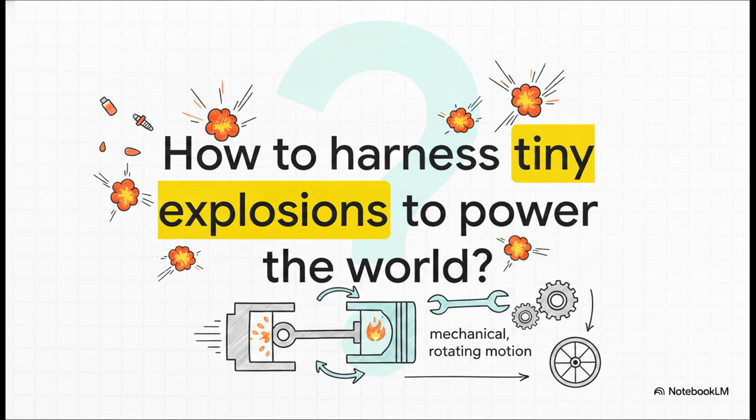Today, we're opening up the hood in this explainer to look at the fascinating physics and engineering that make all of this possible. So the fundamental question we've got to ask is, how exactly do we harness tiny, violent explosions to smoothly power the world? We have to convert chemical energy from fuel into thermal energy, and then somehow turn that intense heat and pressure into mechanical, rotating motion. And the best part? We're going to make sense of this entire process today without getting bogged down in complex calculus or terrifying thermodynamic equations.

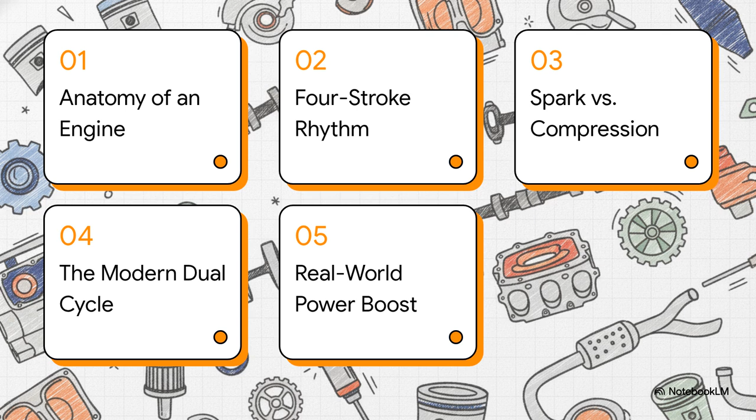To keep things nice and clear, we're going to follow a simple roadmap: 1. The anatomy of an engine. 2. The four-stroke rhythm. 3. Spark versus compression ignition. 4. The modern dual cycle. And 5. Real-world power boosts. Okay, let's jump right into section 1, the anatomy of an engine, the fundamental building blocks of power.

Before we can understand how the engine actually breathes, we need to know the basic physical parts of our mechanical heart. Inside the engine cylinder, there's a piston that moves up and down. Top dead center, or TDC, is the absolute peak of that movement. It's literally the top of the piston's breath, right before it stops completely and gets pushed back down. You can think of it as the ultimate maximum squeeze point.

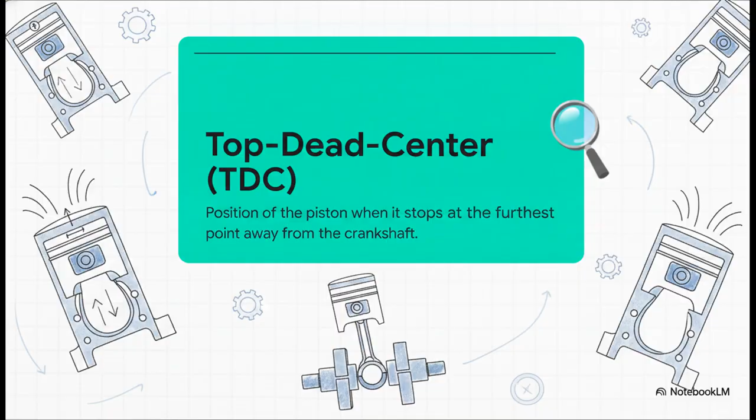Now, when the piston reaches that absolute peak at top dead center, there's still a tiny bit of empty space left at the very top of the cylinder. We call this the clearance volume. And what's really fascinating here is that this tiny clearance volume is where all the explosive magic actually happens. All the air and fuel get trapped and squeezed into this incredibly small pocket, just waiting to be ignited.

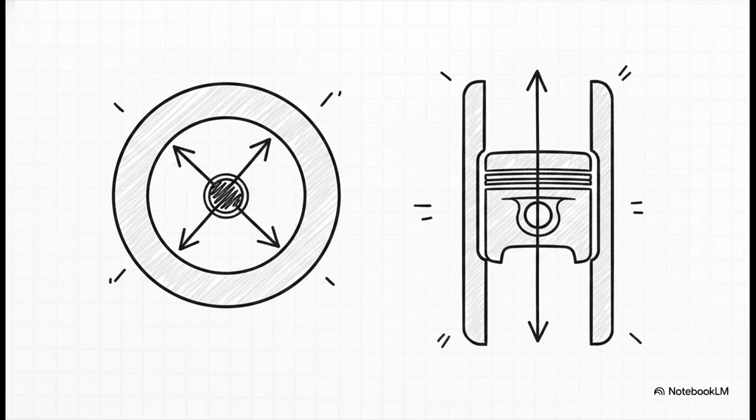To measure the overall size of the engine, engineers use two simple terms: bore and stroke. The bore is simply the diameter of the cylinder itself. The stroke is the total distance the piston travels from its absolute lowest point all the way up to top dead center. Think of the bore as how wide the engine's lungs are, and the stroke as how deeply it breathes in and out.

Together, these determine the engine's displacement, which is a massive factor in how much power it can ultimately produce. Moving right along to section 2, the four-stroke rhythm, the breathing cycle of the ideal Otto engine. Now that we've got our parts identified, let's establish the rhythm. This cycle, which was perfected by Nicholas Otto way back in 1876, acts as the engine's heartbeat. It takes 4 distinct strokes of the piston to complete one single cycle.

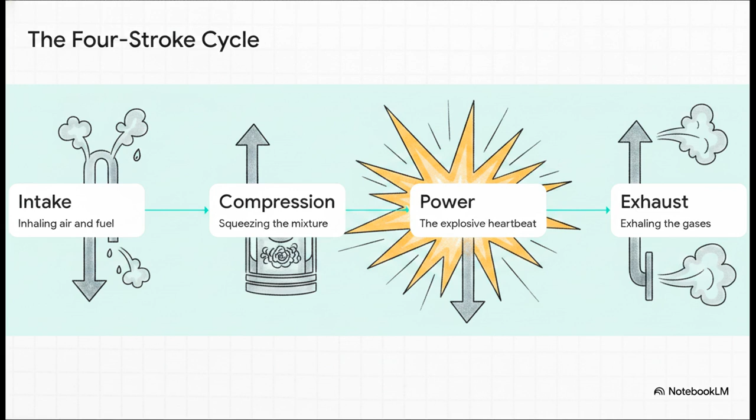First up is intake. The piston moves down, inhaling a mixture of air and fuel. Second is compression. The intake valve closes, the piston moves up, and it squeezes that mixture tightly into the clearance volume. Third is power. A spark ignites the mixture, causing a massive expansion of hot gas that violently forces the piston back down. And finally, the exhaust stroke. The exhaust valve opens, and the piston moves up one last time to exhale the spent gases. Then it's ready to start the whole loop over again.

Thermodynamic textbooks are absolutely filled with dense formulas analyzing this cycle. But honestly, the key takeaway is wonderfully simple: as the compression ratio goes up, the thermal efficiency goes up. Meaning, the harder you squeeze that air and fuel mixture before introducing the spark, the more efficient and powerful the resulting explosion will be. It basically boils down to this: squeeze it tighter, get more power out of the exact same amount of fuel.

Which brings us to section 3, spark versus compression ignition, the great thermodynamic showdown. So there is a physical limit to how hard you can squeeze gasoline before it explodes entirely on its own. And this introduces the historic rivalry between the Otto cycle we just talked about and the diesel cycle, perfected by Rudolf Diesel. The Otto cycle, which uses gasoline, needs an electric spark plug to ignite the fuel in a closed, constant volume.

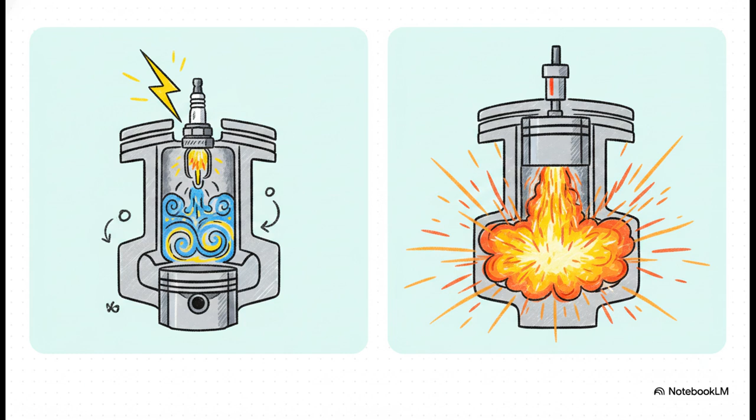But the diesel cycle does something entirely different. It only compresses pure air. It squeezes that air so incredibly hard that the air becomes superheated. Then fuel is injected directly into that scorching hot, highly pressurized air, causing the fuel to self-ignite almost instantly at a constant pressure, absolutely no spark plug required. When we look at the actual numbers behind that squeeze, the difference is just staggering.

Because gasoline engines compress a pretty volatile mixture of air and fuel, they can only really handle a compression ratio of about 8 to 11 before the fuel knocks, or prematurely explodes. But because diesel engines are only compressing air, they can push the compression ratio all the way up to anywhere between 12 and 24. That extreme compression is exactly why a diesel engine is so incredibly efficient and doesn't even need a spark. The sheer pressure does all the heavy lifting of ignition.

When we weigh the real-world trade-offs between these two amazing feats of engineering, a very clear picture emerges. Spark ignition engines draw in an air-fuel mixture, use a spark, and generally run at much higher speeds with a lighter build, which is perfect for, say, a sports car. On the flip side, compression ignition, or diesel engines, draw in only air, use extreme pressure for ignition, and require a much heavier, sturdier physical construction just to contain those massive internal pressures. Because of that heavy build, they run at lower RPMs, but they deliver incredible torque and much higher thermal efficiency.

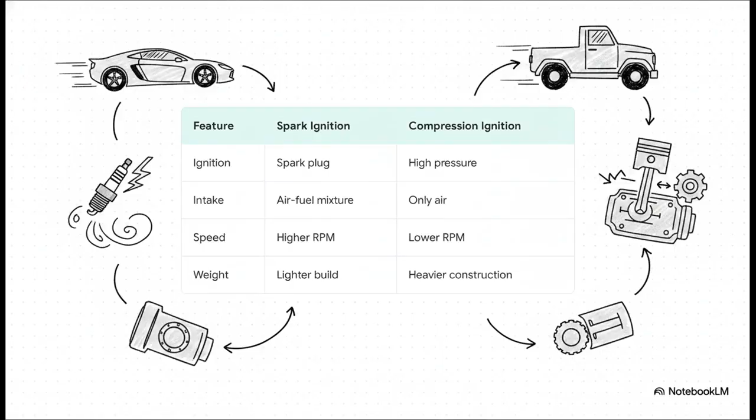Let's transition into Section 4, the modern dual cycle, adapting ideal thermodynamic cycles to reality. The original pure diesel cycle was fantastic for slow, massive engines, but engineers really wanted to put these highly efficient engines into faster vehicles. To make high-speed diesel engines a reality, they had to create a bit of a hybrid compromise.

In a modern compression ignition engine, treating the combustion as strictly constant pressure just isn't entirely accurate anymore. Instead, the heat addition is modeled as partly happening at a constant volume, just like the Otto cycle, and partly at a constant pressure, like the diesel cycle. This clever blend is what we call the dual cycle.

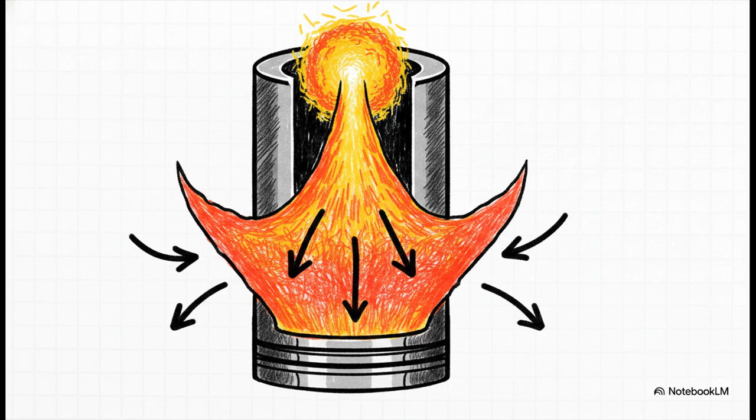Now, how do they actually achieve this dual cycle? Instead of waiting until the piston is exactly at top dead center to inject the fuel, modern high-speed engines start spraying the fuel in at about 20 degrees before the piston reaches the absolute top. This gives that first little bit of fuel enough time to ignite and burn while the piston is still finishing its upward travel, perfectly simulating a constant volume Otto-like explosion.

Then, as the rest of the fuel finishes injecting, it burns as the piston starts moving down, keeping the pressure nice and high into the expansion stroke. It's a beautifully timed dance that maximizes power output and efficiency.

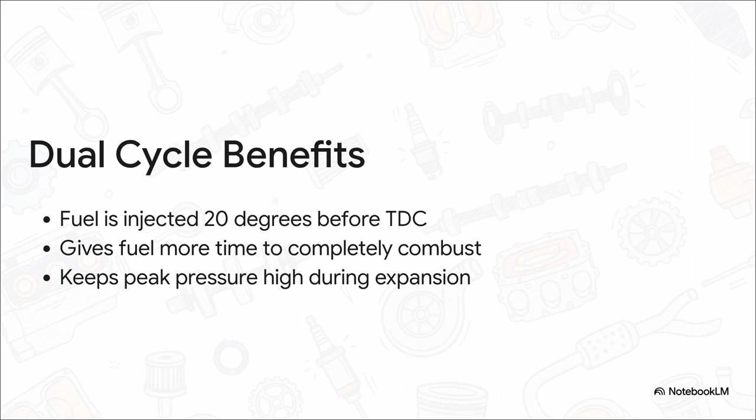And that brings us to our final part, Section 5, Real-World Power Boosts, Turbochargers, and Historical Quirks. Remember earlier when we said that engine power is largely dictated by how much air it can breathe in? Well, engineers, being engineers, invented ways to force-feed the engine air.

A supercharger uses a mechanical compressor driven directly by the engine's rotating crankshaft. It's super fast, but it adds what's called a parasitic load, meaning it actually steals a little engine power to make a lot of engine power.

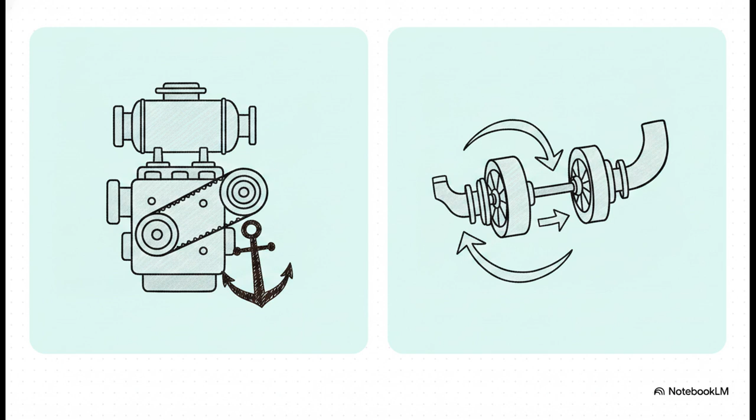But a turbocharger? That's an elegant piece of engineering right there. A turbocharger uses a turbine driven purely by the rushing exhaust gases leaving the engine. It literally recycles the wasted exhaust energy that was just going to be blown out the tailpipe anyway, using it to compress incoming air and force it into the cylinders for a massive, efficient power boost.

And history provides some truly wild anomalies that show just how creative engine design can get. Back in World War I, the famous Sopwith Camel aircraft, yes, the exact one Snoopy flies in the Peanuts comic strips, used a rotary engine that turned conventional design completely inside out. Get this: instead of the engine block sitting still while the crankshaft spun the propeller, the crankshaft was bolted rigidly to the airplane.

The entire massive, heavy cylinder block of the engine rapidly rotated in circles around the stationary shaft, taking the propeller with it. This crazy setup kept the engine cool in the air and generated massive gyroscopic forces that allowed the aircraft to perform incredibly sharp, unique dogfighting maneuvers that standard planes simply couldn't match.

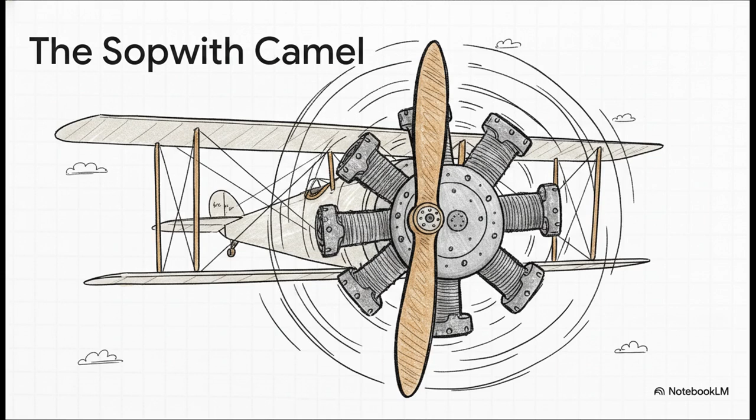So, from the Otto cycle's perfect four-stroke rhythm to the extreme pressures of the modern dual cycle, and even those spinning engines of early flight, we've spent well over a century mastering the art of the internal combustion engine. But here's the thing. While we have spent 100 years perfecting the art of harnessing tiny explosions, we're now brushing up against the absolute physical limits of thermodynamic efficiency.

As we look to the future with new fuels and new technologies constantly on the horizon, we really have to wonder, what will the heartbeat of tomorrow's machines look like? Are we just going to see a refined combustion cycle, or is it going to be something entirely new?